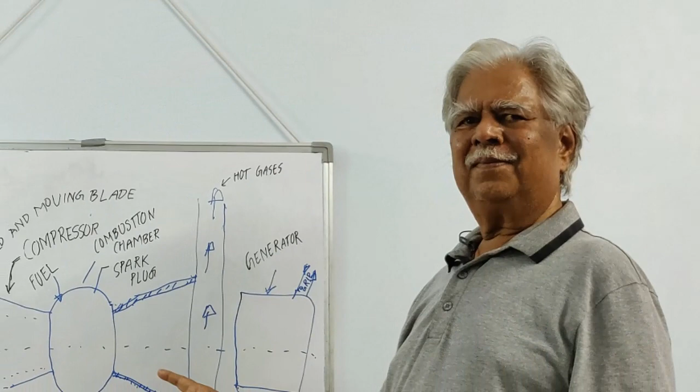I am going to continue last episode's discussion with my grandfather, which was about gas turbines. I currently have my grandfather with me, who is going to explain the different problems occurring during the working of a gas turbine. Azuba, can you continue? Hello, Ayush.

This gas turbine operates at very high temperature. In the combustion chamber, temperature is around 1000 degrees centigrade, which is much higher, making the metal go bad within a certain operating period.

So the manufacturer gives us a limitation of how much period you should operate it before you can go for maintenance. Maintenance is done on the gas turbine, compressor and combustion chamber. Combustion chamber liners are subjected to deterioration, so they need to be checked, and the fuel nozzles, which are very important, need to be removed and reconditioned to make it operate at the highest efficiency.

Plus the exhaust of the gas turbine is also very high temperature, around 500 degrees centigrade, and normally it is left to the atmosphere. But...

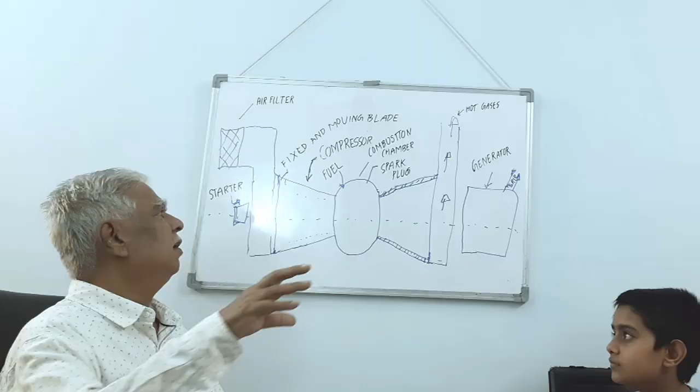Yes, I think I've got all my answers, and we are going to ask a few common questions as well, so I think you would also get your answers if they're left unanswered.

Azuba, I have a few common questions related to this machine which I'm going to ask you. These are multiple choice questions in which you'll have 4 points and you have to pick the right one out. Are you ready for the challenge? Yes, sir. Let's begin. So I have my questions right here and I am going to ask him these questions. He has to answer them within 10 seconds. Let's see if he can do that.

The major fields of application of a gas turbine are: aviation, oil and gas industry, marine propulsion, or all of the above. All of the above. Can you explain why this is the right answer?

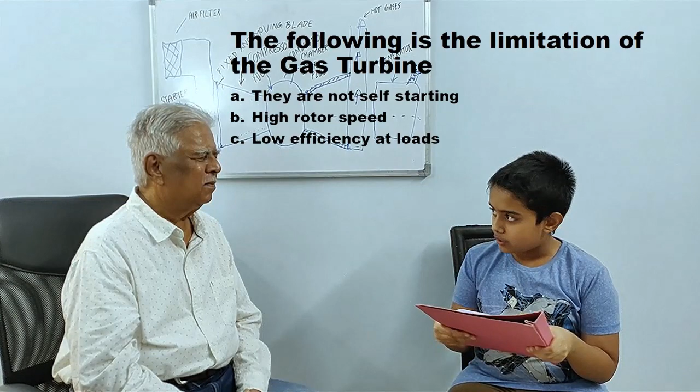Now the second question: the following is a limitation of gas turbines - A. They are not self-starting, B. High rotor speed, C. Low efficiency at loads, or D. All of the above. All of the above.

Because the gas turbine needs to run or start rolling first, that is, a starter is very much required, whereas the steam turbine doesn't need a starter. That is a big problem with the gas turbine, and its efficiency is very low because its inlet or combustion chamber temperature is 1000 degrees centigrade, whereas the exhaust is hardly as high as 500 degrees centigrade, so the thermal efficiency is very low.

Now the third question: which of the following is used to start the gas turbine? A. Internal combustion engine, B. Steam engine, C. Auxiliary electric motor, or D. All of the above.

No, it is two things. It is not steam turbine - it is a diesel engine, which is called a black start machine, because if site power is lost, electrical power is not at all available, so a motor cannot start the gas turbine. So we need a starter done by the diesel engine, called a black start machine. That means if there is no power at all in the site or the grid, you can run the machine within 10 minutes and start supplying power to the grid.

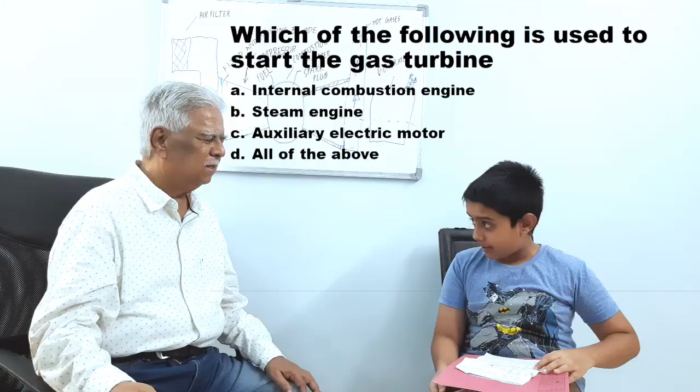And for this question, C, right? Auxiliary electric motor - if power is available, then electrical start machines will be there. And actually the large machines, that is 90 megawatt and above, are electrical start machines only.

Whereas the small machines, like up to 20 megawatt, they are diesel start, so that they can supply the site power, also the grid regeneration.

Okay, now the fourth question. Gas turbine is shut down by A: turning off the starter, B: stopping the compressor, C: fuel is cut off from the combustor, or D: any of the above.

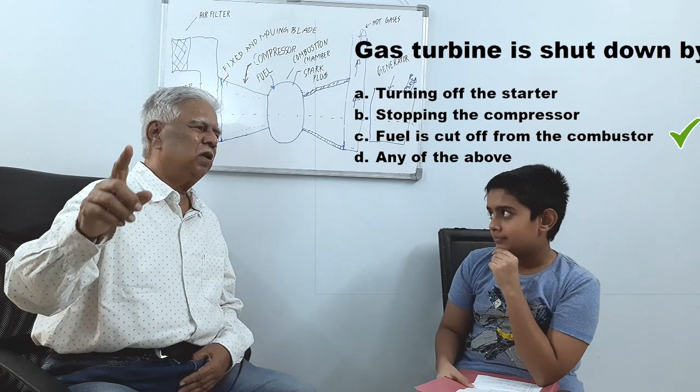No, it is basically the fuel is cut to the combustion. So the firing stops in the combustion chamber, and the hot gases don't drive the turbine, so the turbine anyway comes to a standstill.

So you're saying that once the combustion chamber is turned off, that is, you don't allow the fuel, the fuel is turned off. Yes, so there's no combustion, flame goes off, and then you don't have the fuel, you don't have the power to run the unit.

Okay, question 5. In a centrifugal compressor, the diffuser converts A: kinetic energy to pressure energy, B: pressure energy to kinetic energy, C: kinetic energy to mechanical energy, or D: mechanical energy to kinetic energy.

Let us say the compressor compresses the air and it flows at the highest velocity to the diffuser, and the diffuser converts that velocity energy into pressure energy. Okay, so it's A, kinetic energy developed.

So I have a question again. In a centrifugal compressor, what do you mean by centrifugal compressor? Centrifugal compressor is a rotary machine, it is not a reciprocating machine.

Okay, question 6. What can be used as fuels to the gas turbine? A: natural gas, B: petroleum, C: diesel, or D: all of the mentioned.

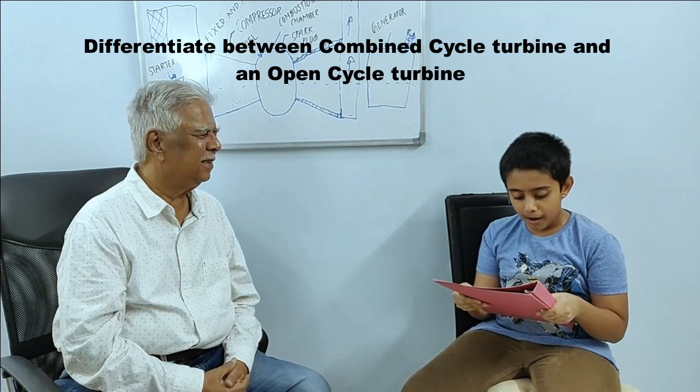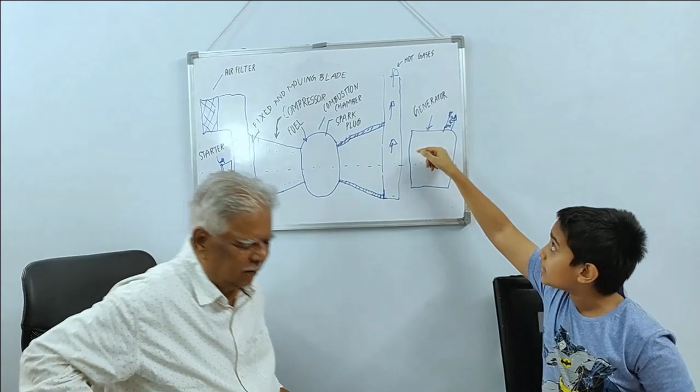I want to just say that the open cycle turbine is this one which you are seeing. Yes, because the exhaust is being given out by the chimney. So yeah, it's like that. This is a chimney which takes the hot gases to the atmosphere.

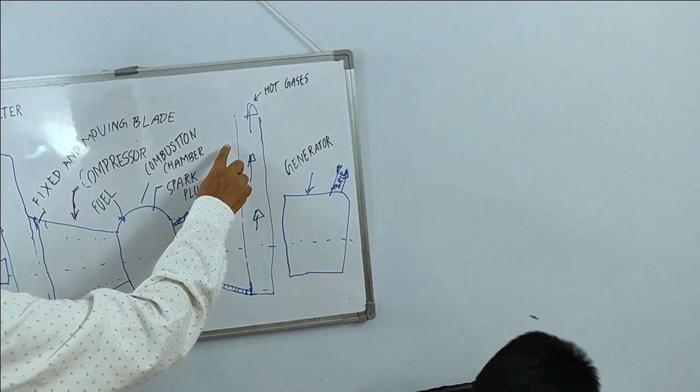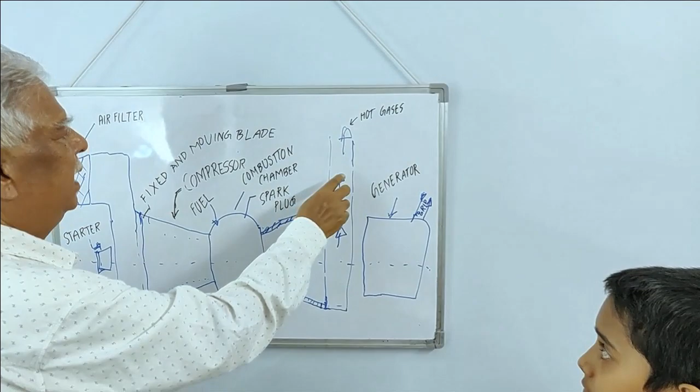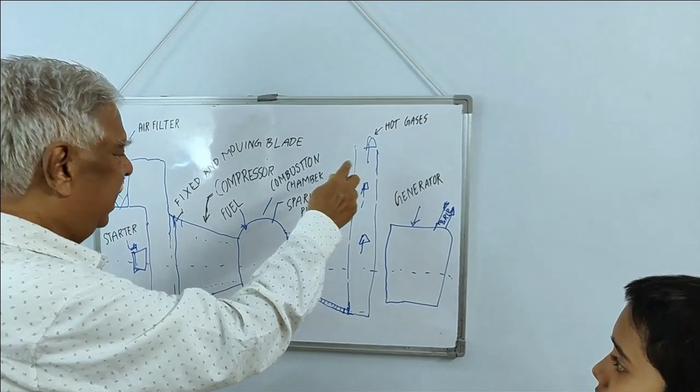But if you put a boiler here which heats the water and converts it into steam, the steam goes to the steam turbine, gets condensed, and comes back as water to the boiler - that is combined cycle with the gas turbine, which has a higher thermal efficiency.

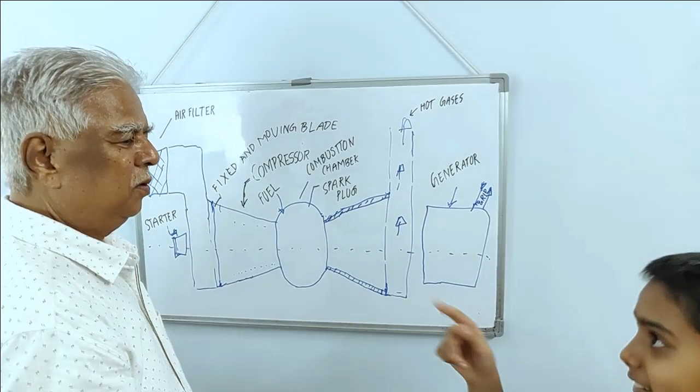You had said that was around 35%. Yeah, and an open cycle has about 29. Open cycle is just hot gases we are letting out.

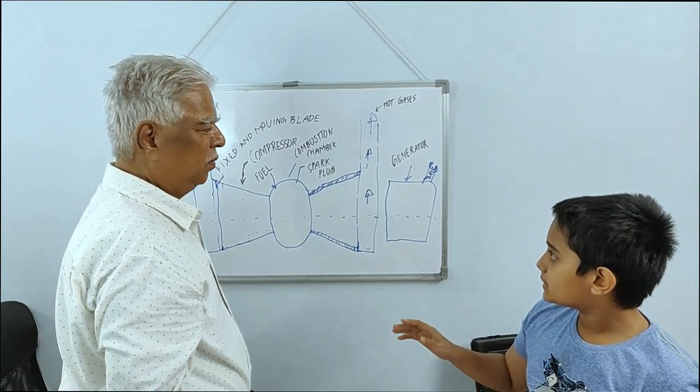So you're saying that gas turbines can even drive steam turbines? No, the gas turbine is not driving it - it's the steam which is generated in the exhaust.

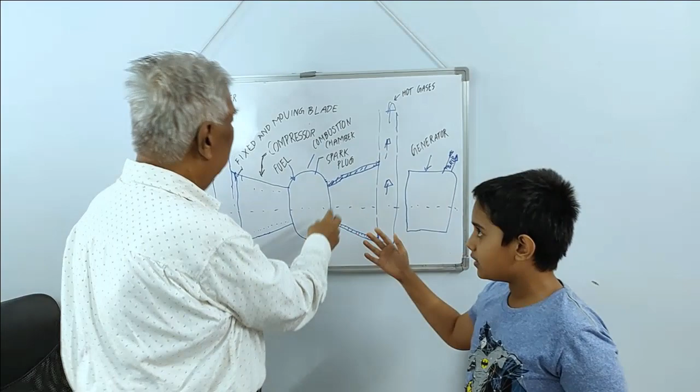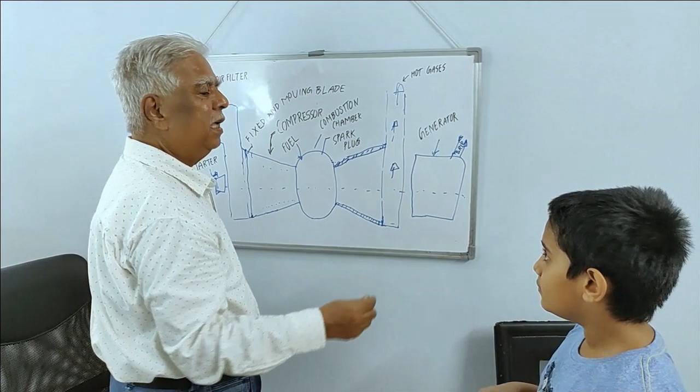Okay, so the combined cycle is not for these machines. No, this is additional equipment they put on the exhaust - an additional unit called waste heat boilers. The waste heat boiler generates steam, and the fuel is the waste heat, which is the exhaust of the gas turbine.